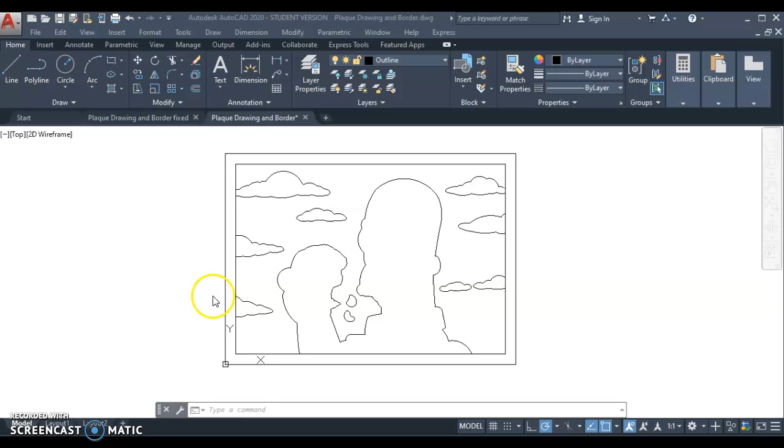So let's try and fix this layer up. Again, this is just supposed to be the outline layer. I'm not sure with all the errors in this one whether or not his other layers should get checked too. I guess depending on the time that I have for this video, I could check a few more layers and see.

Let's try and first of all trim around, and I'll show you what's going on. So modify and trim, and of course I hit enter so that all lines are trimmable. And now I'm going to head in here, so click.

All right, good. Now I've got it going around the cloud. Click all the way around this cloud, click all the way around this cloud. Then I come over here and notice that it doesn't allow me. You can see the universal sign for, yeah, that ain't happening. So okay, I'll just finish over here first, and then I'll try and figure out why that was the case.

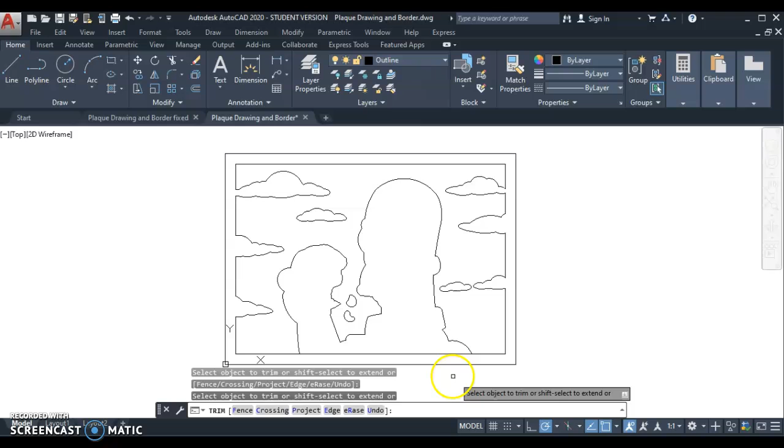So then I hit escape to get out of that command, and I kind of zoomed in here to take a look. Sure looked like it was attached to the line. I zoomed in over here to have a look. Sure looked like it was attached to the line.

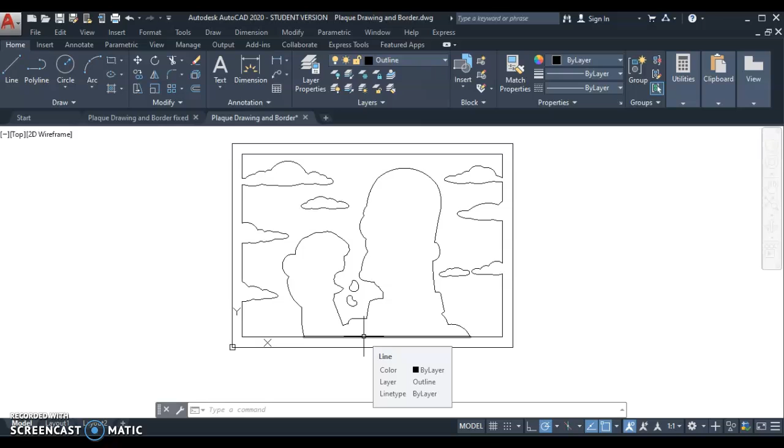So then I realized, oh, when I hovered on top, so let me just make sure I bring it fully up and pan it back. When I hovered on top, it's all just one line segment. Oh, crap, I didn't need to trim it, I could have just deleted it. So I'll click on it and delete it.

So there it goes. Oh, wait, it's there again. And now it's attached to this extra line in here. So now it's actually trimmable. So he has a couple of mistakes — he had one line on top of another line.

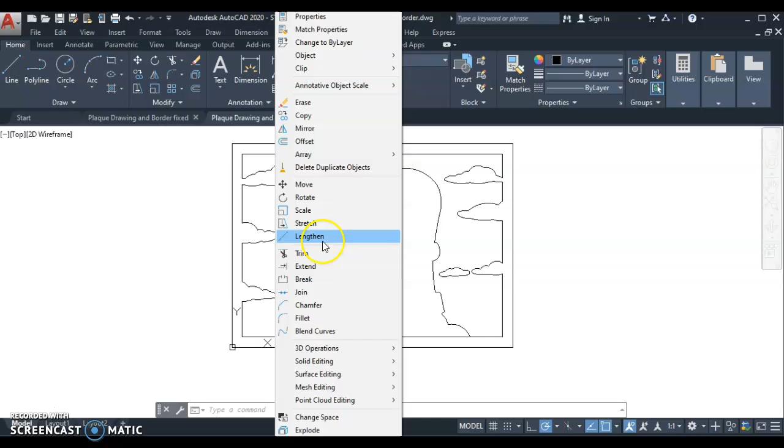So I'll try trimming again. So trim, enter, so all lines are trimmable. And now I'll try and trim this. Oh, look, it let me trim it, but it didn't let me trim it past here. What?

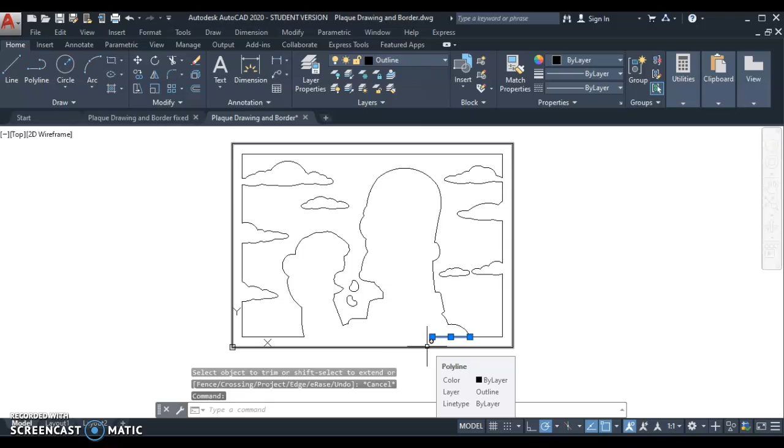So I'm going to hit escape, and I'll assume that this little guy is also by itself, so I'm going to delete it. These are some really common mistakes. Now this should be in good shape to mill out this background of Homer with the 1/2-inch tool.

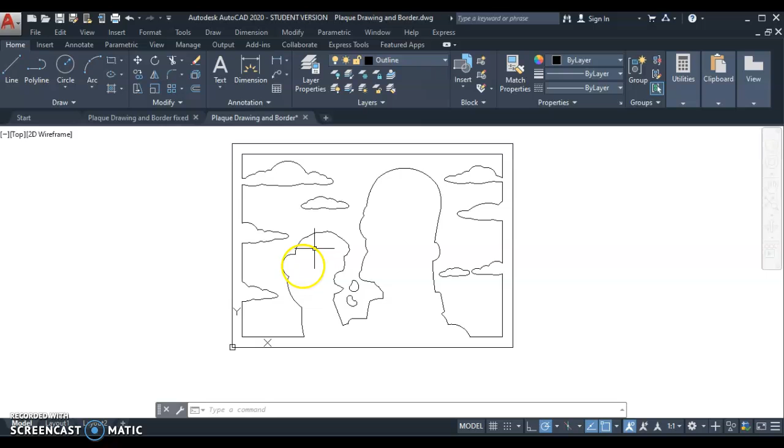It will go where it can, and then it would need to be cleaned up with the 1/4-inch tool and a contour all around to get the detail, then that would be done again all the way around, same depth, with the 1/8 inch tool as a contour. You'd have to make sure the arrow for contouring was counterclockwise, and for the pocket it doesn't make any difference. I hope that makes some sense.

We do have a few more minutes left, so I'm just going to save this particular one and try a different layer. He probably has only this layer turned on. Let's have a little look and see.

So it is true that he apparently has this crazy Defpoints layer on also. This is a terrible layer to have in a drawing, because someone did the dimensions command prior to a second layer being made. So this is a very dangerous layer to have on.

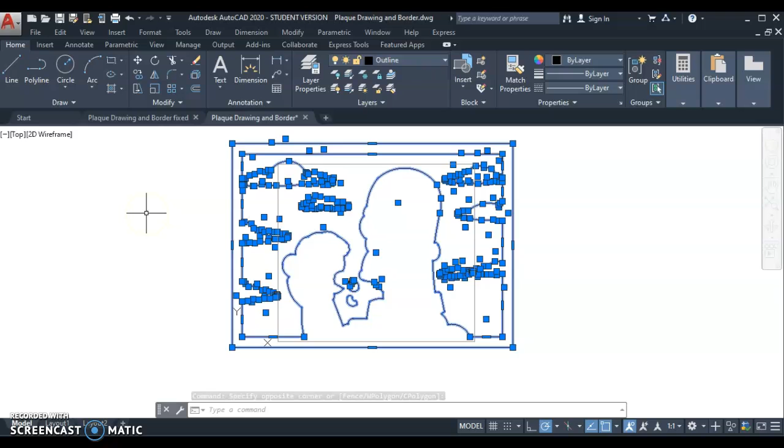Let me get off that. I already checked that there was nothing on any extra layers in here. I clicked and surrounded it, and everything is on the outline layer. So that's good news. Again, I don't know if there are other extra lines on top of other lines in here. The only way to check that, if you've not been careful about drawing cleanly, is you have to select them, delete them, undo it, and this is really aggravating and takes a long time. In this cloud, if he's got extra lines in here, it would take forever. But there's not a lot of choices if you've failed to execute in terms of drawing cleanly.

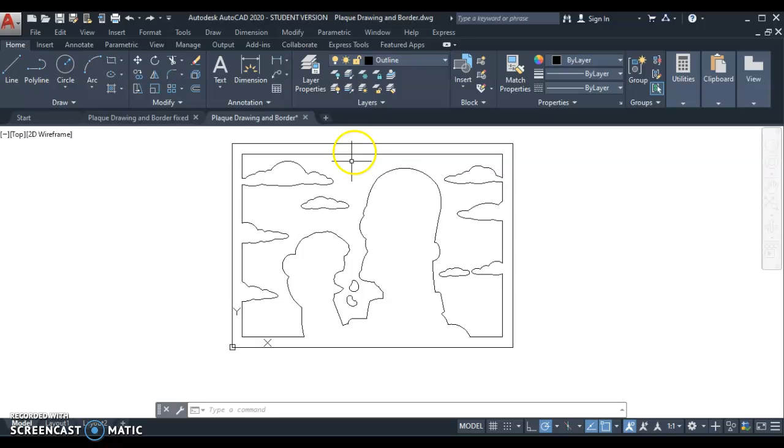So let's check another layer out just for fun to see what he's got going on. So this is the hands. I'm just going to turn off these and say okay. So this is his next layer. Looks like he's going to put some LEDs in.

And as you can see, he actually has the exact same error here. This line here cannot be here. If he wants to pocket this, the tool doesn't know whether to go this way or this way. So he actually needs to trim these out.

And these lines, this line right here and this line right here, and actually this little line right here, they should be on their own layer, and they should be engraving on their own layer, because if they touch this outline, then they cannot be included in a mill. So we actually should make another layer and just delete all of the items that are surrounding, and just keep these little lines here that are going to be tiny engraving lines.

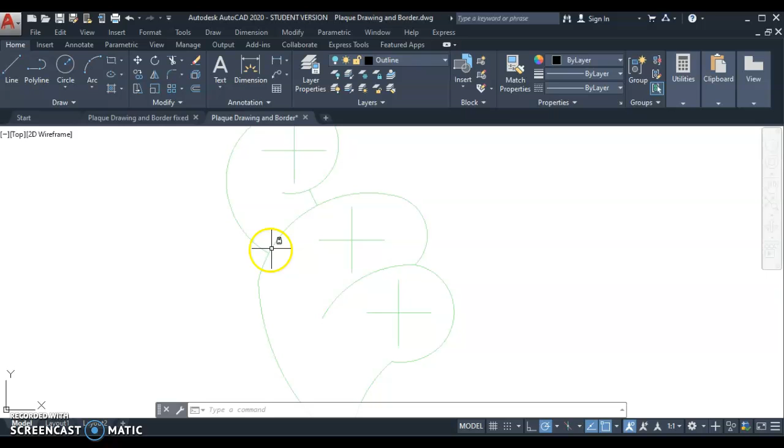Let me zoom in to make sure you understand. This would be engraving, this would be engraving, this would be engraving, and then I actually see a dangerous thing here. It looks like, well, maybe it's okay. It kind of looked like maybe it wasn't a good, clean intersection here.

So again, this way, when the tool goes around the inside of this and pockets these fingers out, it needs one continuous path all the way around. Again, when it comes here, it won't know whether to go this way or go that way. So again, these engravings need to be on their own layer.

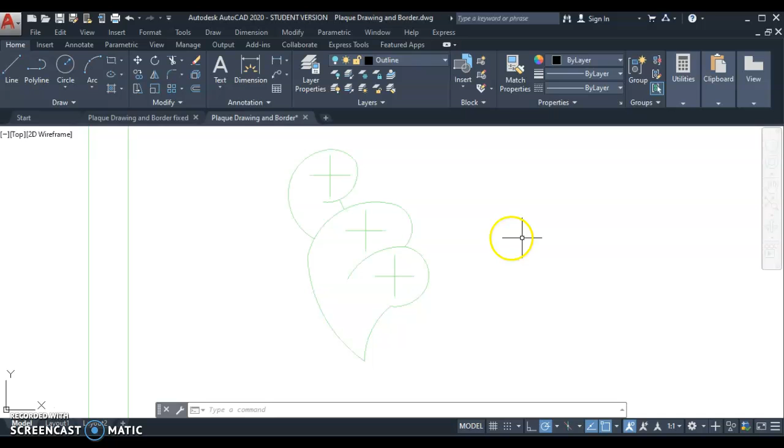Let's roll out and see what else he's got going on. So this should be fine, nothing wrong with that. This again suffers from the same problem. These engraving lines, this is engraving right here. This is engraving. This part wouldn't be a problem in the middle, but because these two guys touch the edges, they need to be on their own layer. So engravings need to be on their own layer if they touch the sides of an object.

And I probably didn't do a good job covering that. So that's why this video exists.

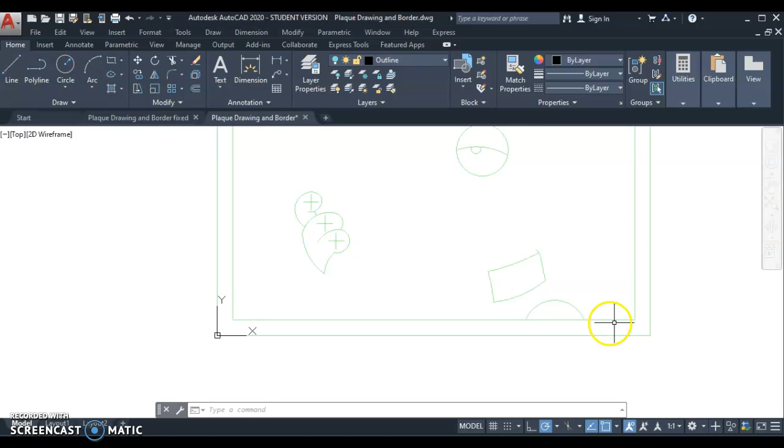This is also not going to work. So in fact, this would have to be trimmed away, and this line would have to be trimmed away, so that there is a single entity here, so that the tool can cruise around on the inside of this and pocket this out, probably with a 3/16 tool, and then clean it up with a counterclockwise toolpath with the 1/8 inch tool, a contour. So I hope that makes sense.

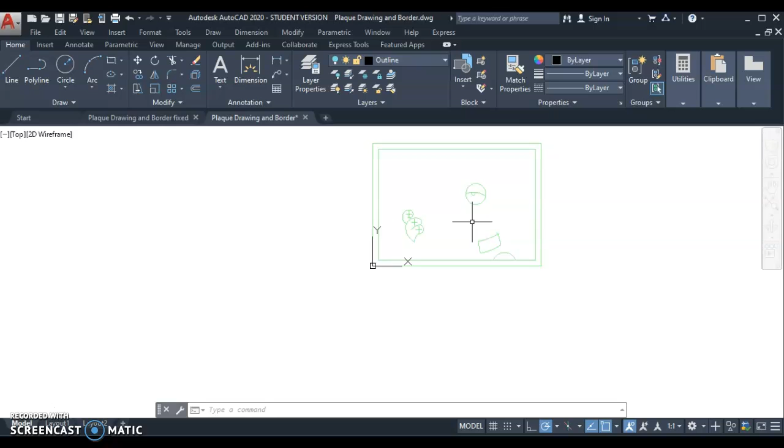Let's go to another layer. So again, he would have to make a copy of this layer and then put the engraving on the specific layer, by deleting all of the items that are part of the pocket.

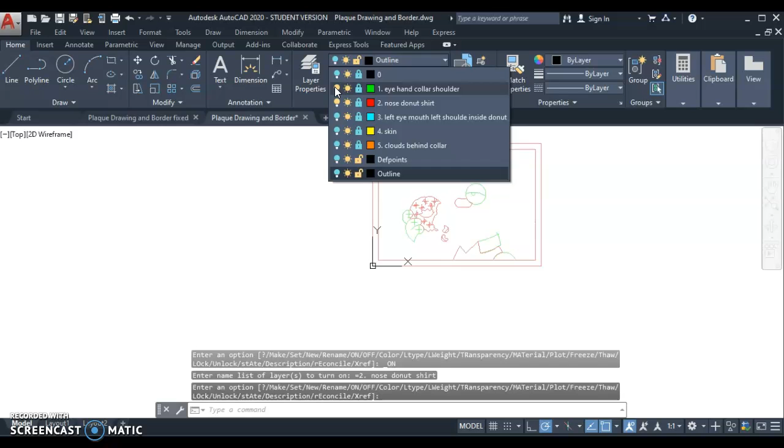Same thing, he would have to trim this line out and this line out so that this is a single entity. This is fine, it's all by itself. This is actually fine, because these little areas on the inside are all little islands that don't touch each other, and they've got LEDs inside them.

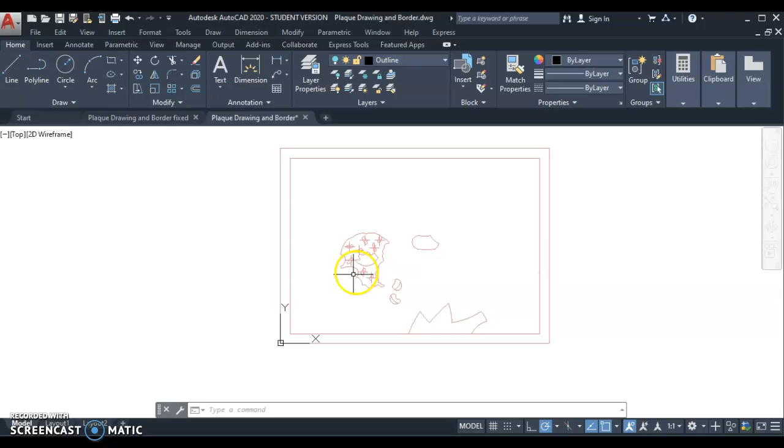They're kind of tiny, but it might work. This one actually is sketchy. You would have to probably delete this one because, again, it's touching the edges. Or you could just trim out this little line here, and the tool would just go around that. So that's also possible.

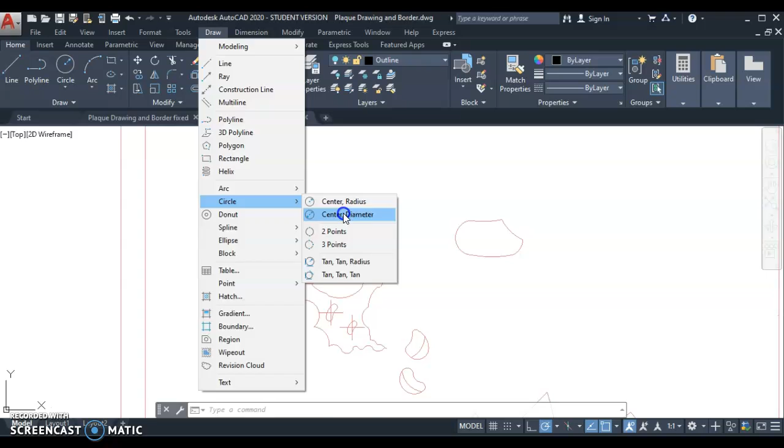Obviously, 3/16 tool in here. If it fits, I hope he checked. We could quickly check that too. Here, draw circle, center, diameter. So I'm just going to put this in here and do 3/16. Enter. I don't really see it, so that makes me nervous.

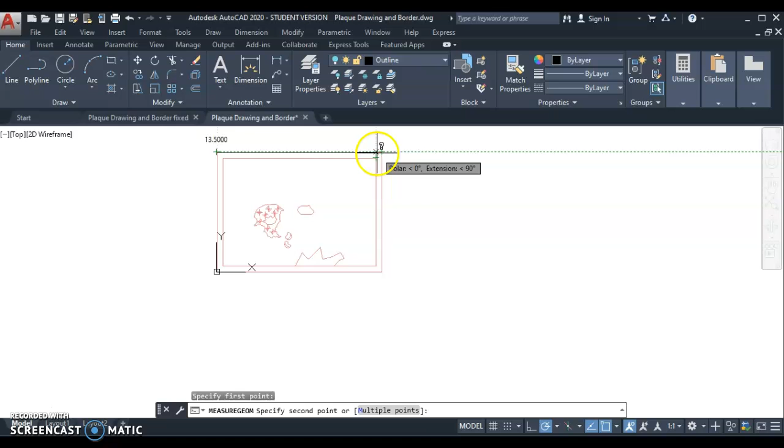I wonder if his plaque is even the right size. Let's have a little look and see. So tools, inquiry, distance, from here to here. Oh, that is 13.5. So I don't really know why that didn't show up. So his plaque is the right size, and it is at 0, 0.

I'll try drawing that circle one more time. Oh, maybe I'm on the wrong layer, right. I'm on the outline layer, so you just turn the outline layer on. So that was the answer to that. So there's our little circle.

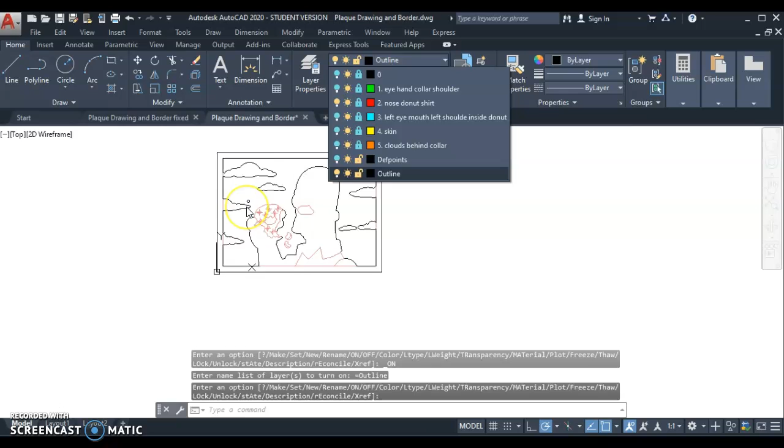Let's see if our little circle fits in. Just going to grab it here and grab the middle. Let me just make sure that it goes in here. Yeah, it's pretty good, I mean it fits. I don't know about getting down through that gap there, but it kind of fits in here, so it might work. So I hope you checked.

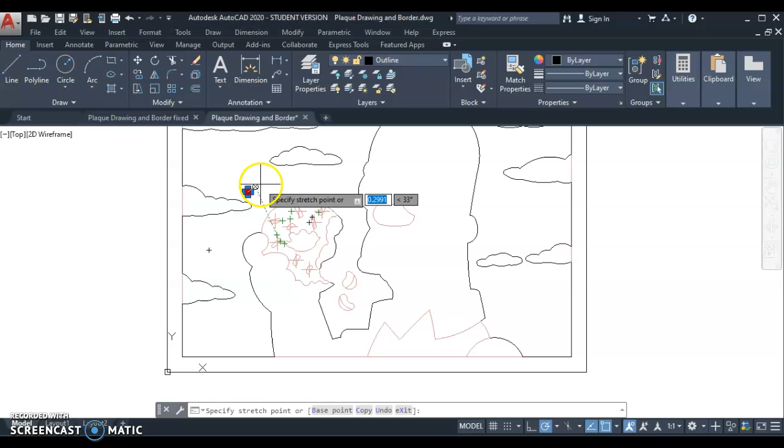All right, let me just delete that from here. Delete. Okay, and I'm going to go back and turn that layer back off again. So turning it back off.

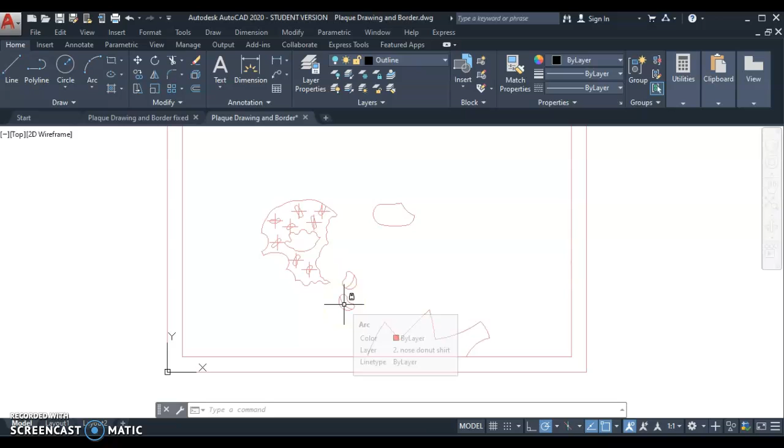Yeah, okay great, so we talked about this guy. This engraving right here and this engraving right here would have to be on their own separate layer. Okay, got time for one more.

So he definitely has some work to do. And again, I don't even know if he has extra lines on top of other lines, because that also is definitely going to be a disaster. So let's go here and check this layer out.

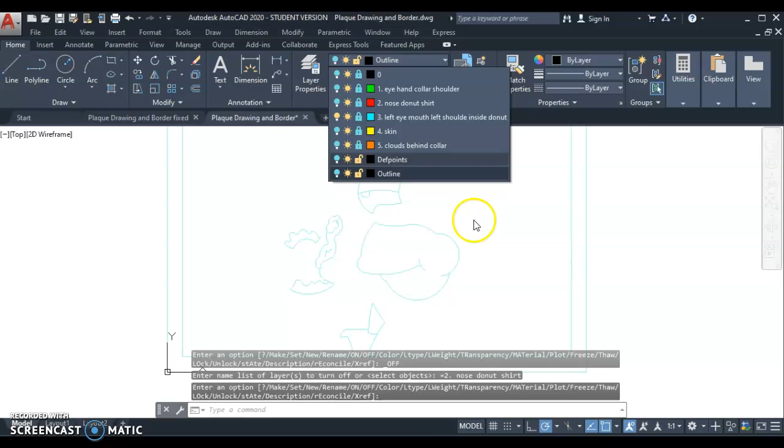And looks to me like there's lots of issues here. This would need to be on its own layer, all this engraving. And in here, this engraving actually would probably be okay. See how it doesn't touch the edges? This is clearly not going to work.

This can't even be here at all. It shouldn't be here at all. These are not, it's not a pocket, it's not part of a pocket. So this is a pocket. This should just be fully deleted.

This is a pocket here, and this engraving is fine. See how it doesn't touch the edges? This pocket is fine. This pocket needs some work. See, because this would be engraving. This would be engraving, this little part of this line would be engraving. All of that would need to be on its own layer.

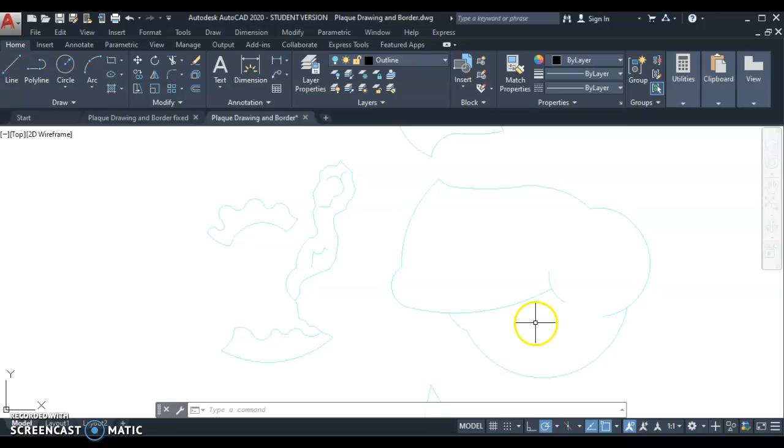And then let's look at the top here. And again, I already talked about how that engraving would have to be on its own layer. I hope that makes some sense. It's really important that you understand that. So hopefully this video has explained that.

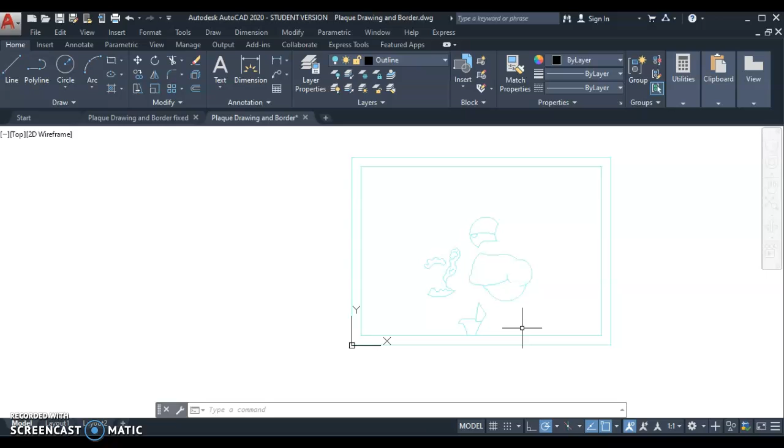He definitely needs to make layers for his engraving, right? Because he's got a lot of it, and a lot of it is touching the sides of these little individual pockets. Okay, great. That's it for now. I'm done.